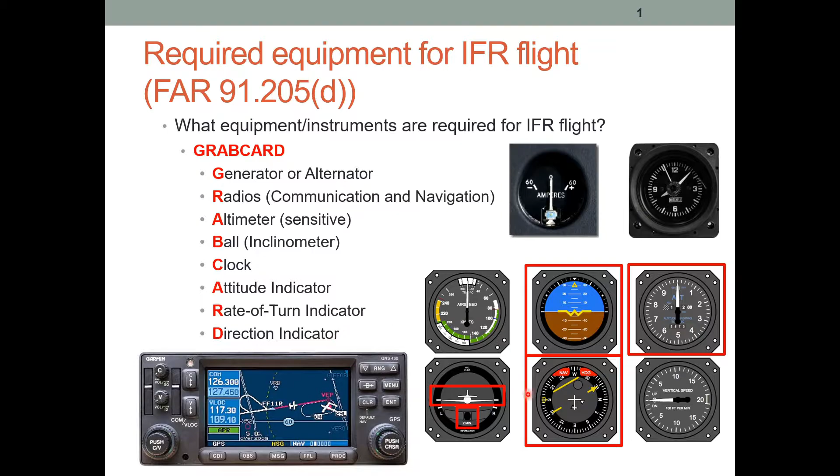Attitude indicator, which is right here. Rate of turn indicator, which is right here. And your direction indicator, which is down here. So next is your glass cockpit or primary flight display, which is down here. And it says, do glass cockpits have the same equipment / instruments?

They do. They get you their data in a different way, but they have everything you need for an IFR flight. Right here is your airspeed indicator. This is your altimeter. This is your VSI. Of course, it's straight and level, so it's not reading anything. Right here, this is your ball, more or less, or your inclinometer. This shows you your angle of bank.

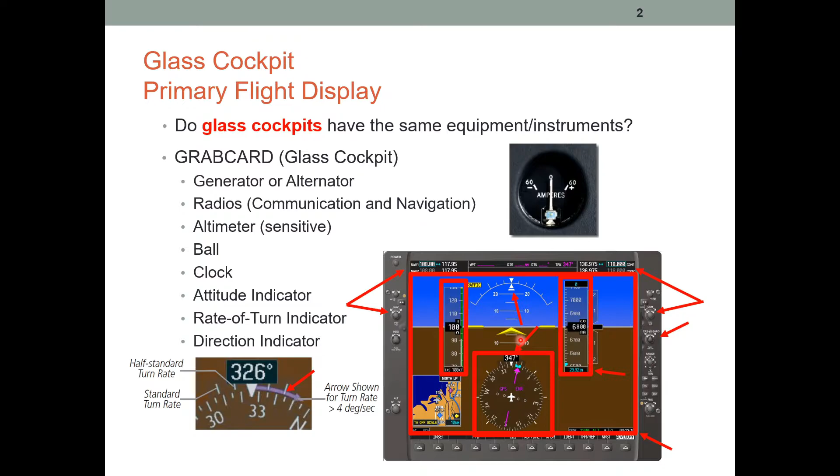This right here is your HSI, or your direction indicator. This is your attitude indicator, and that's pretty much everything you need for an IFR flight. Remember GRABCARD though, that is the big thing to remember. And next we have which instruments are traditionally gyroscopic. Big word, traditionally, because nowadays you're getting your data from your air data computer or attitude heading reference system.

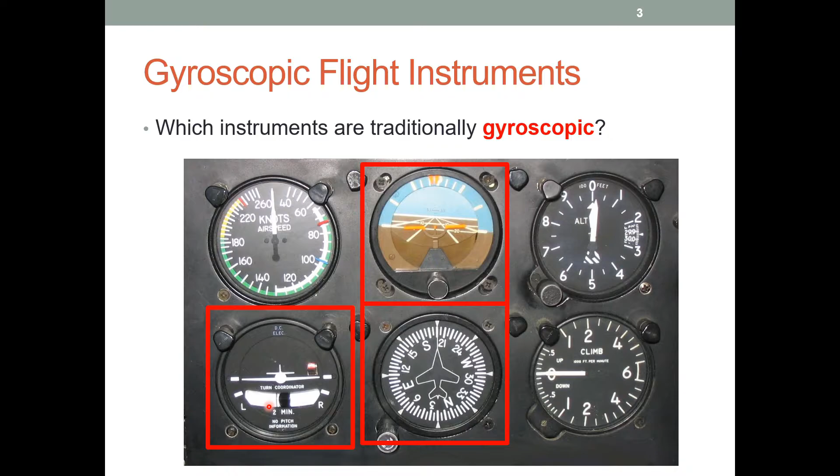But back in the day, your gyroscopic instruments were powered by a vacuum driven engine pump, which is your attitude indicator, your direction indicator, and your turn coordinator. Your turn coordinator is actually gyroscopic, but it is electrically powered instead of vacuum powered. Next, we have what are the principles of a gyroscope. So the two main are precession and rigidity in space.

So imagine these, you see these little spokes right here. Imagine they are actually attached firmly to the aircraft. As the aircraft moves around this gyroscope right here, which is spinning rapidly, which is why it is rigid in space, that is going to give you whatever you need it to give you. It's just not going to move.

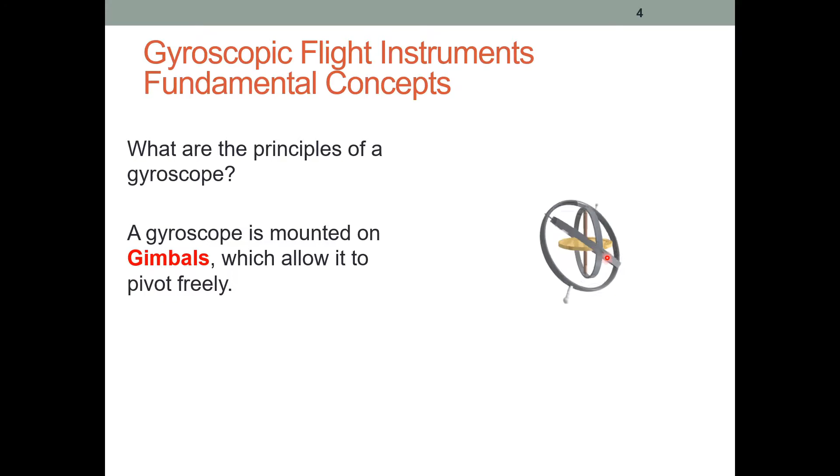And that is what's so crucial, because there used to be this thing called seat of the pants flying, which a lot of pilots did, and a lot of pilots died because of that, because you don't know where you are. That's why in the last unit I covered spatial disorientation, that's why gyroscopes are so important to maintaining that orientation. And the gyroscope is mounted on gimbals, which I just showed you, which are the things that freely rotate around your gyroscope.

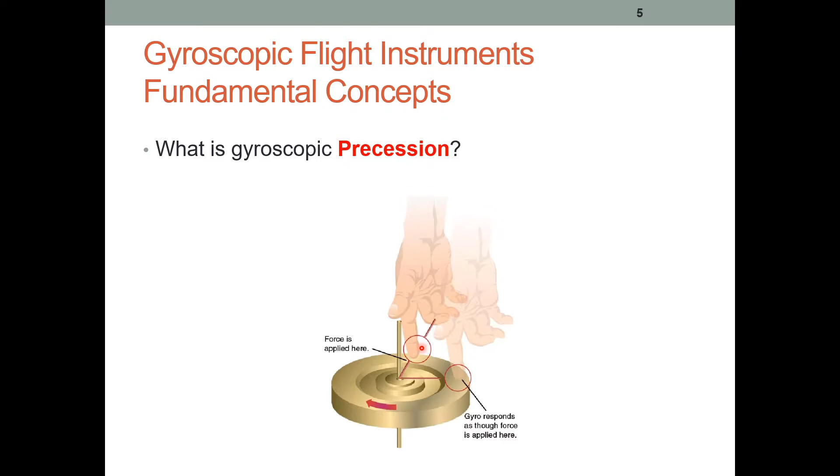So next we have precession. I just discussed rigidity in space. Precession is more or less as you apply a force to a rapidly spinning gyro, that force is going to result 90 degrees later. And actually go on Vsauce and look up gyroscopes, because Vsauce gives you a great example. And I know Vsauce is like a meme channel, but it's a really good example of how they work. It discusses precession and rigidity in space.

The next we have is the attitude indicator. So actually on an attitude indicator, you see these fins right here. These fins do not move at all. What actually moves is the artificial horizon in the background, which as you pitch up or down, is going to make the artificial horizon move down or up. And then you've got this ball down here.

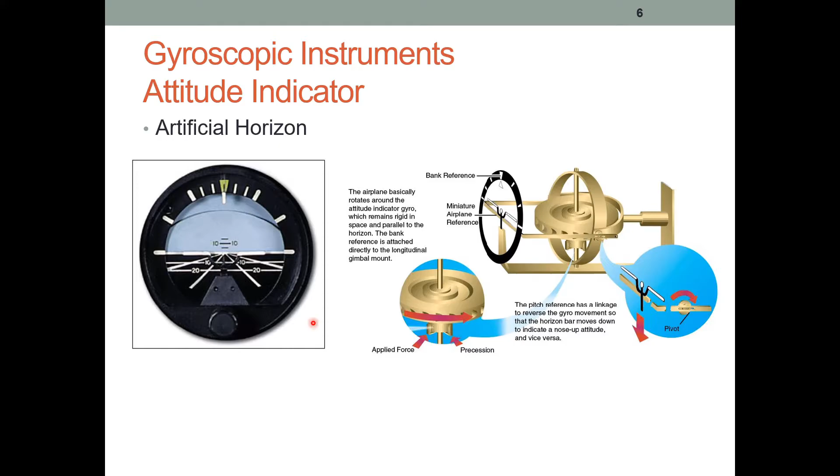So when you start your aircraft up, you want to set these fins to the artificial horizon. You want to make sure after 5 minutes, after the vacuum has enough power, after it's rotating fast enough, that it is correct and stable. If it's not, you might have a big problem on your hands. This, of course, is a schematic of how it all works. It's really cool to look at if you want to, but that's just the general principle.

Next, we have how do we adjust the attitude indicator before flight? I literally just went over that. It's by this little knob right here, and you adjust the little plane up or down. Of course, in a PFD or a glass cockpit, you don't get that privilege because it automatically does it for you. But if you ever fly steam, which is what I learned on, that is something you need to do.

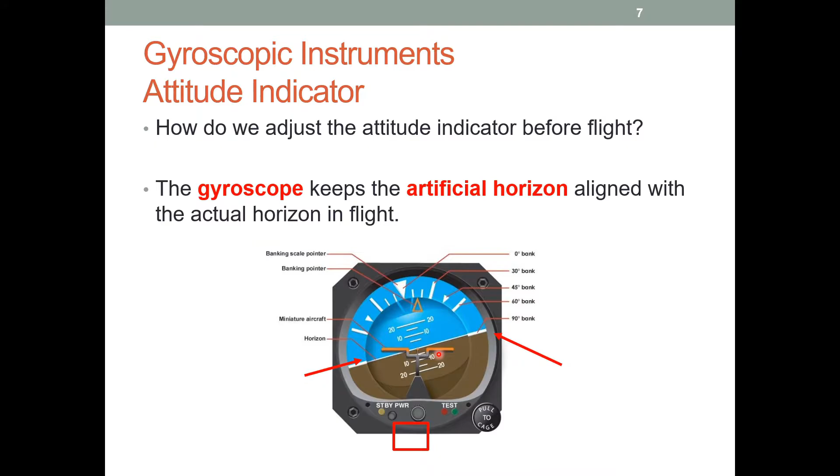So there you go. Next we have, when does the attitude indicator have the greatest errors in a turn? So whenever you turn a full 180 degrees, that is when your greatest error occurs. So just think about it.

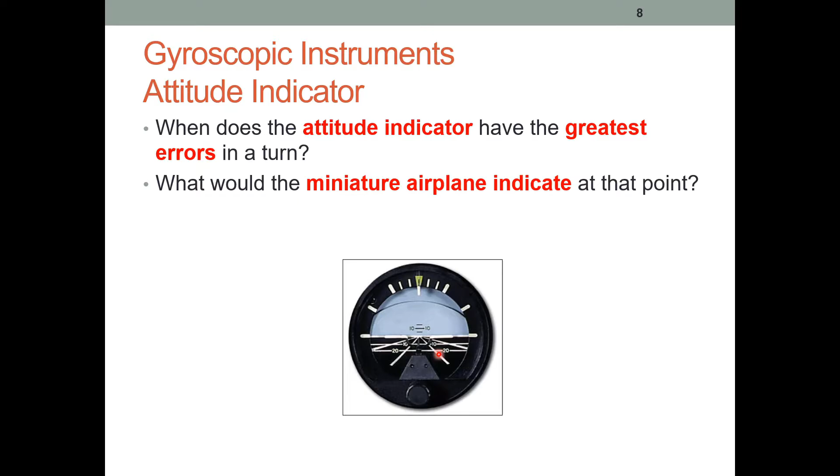East to west, you turn that much, and that's going to make your attitude indicator precess. If we go over here, imagine you are turning to the left, like a steep turn to the left, and you come out of that turn. Your attitude indicator, the gyros inside of it, are going to want to precess, and it might show you a slight indication to the right.

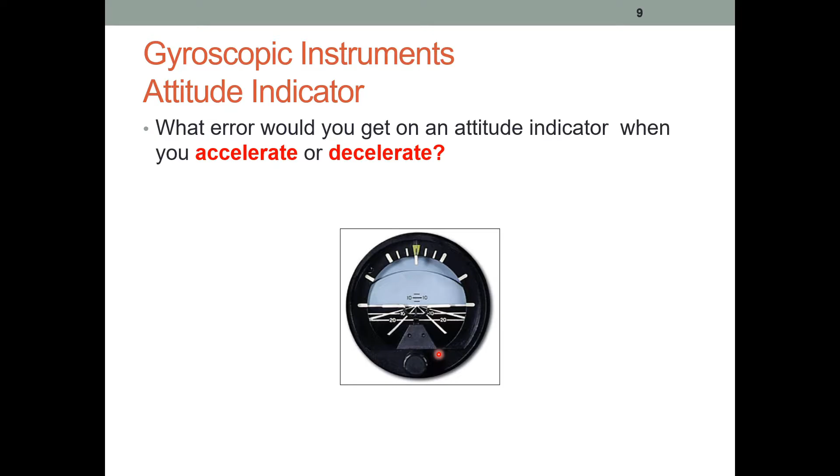Now in VFR, this is no issue, but in IFR, it can lead to some moderately severe, that's an oxymoron, disorientation. But just remember, if you're coming out of a turn from the left to straight and level flight, you might get a turn in the opposite direction. And that's one thing on your written that you'll have to know. And it's one thing to know in flight because it can lead to spatial disorientation, which we don't really like.

The next is tumbling. Now, you won't really experience this in electronic, PFD, glass cockpit stuff. But back in the day with aerobatic planes, or if you've somehow upset your plane so much, not emotionally, of course, just like stalled or whatever. If you exceed 100 degrees of bank or 60 degrees of pitch, so 60 up and down, 100 left or right, it's going to tumble your instrument because the gyroscope is going to precess so much that it just interrupts the whole flow of things, and this is what it might look like.

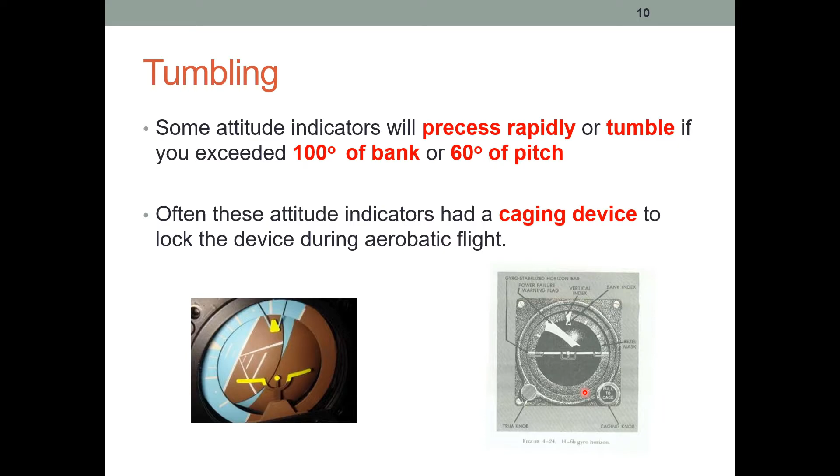Now, after a while, they will come back straight and level. It will catch up with itself and it will stabilize, but sometimes they will not, which is why it is incredibly important to know this. That is why a lot of them have cages, which will cage the gyro so it cannot move, which means it cannot tumble.

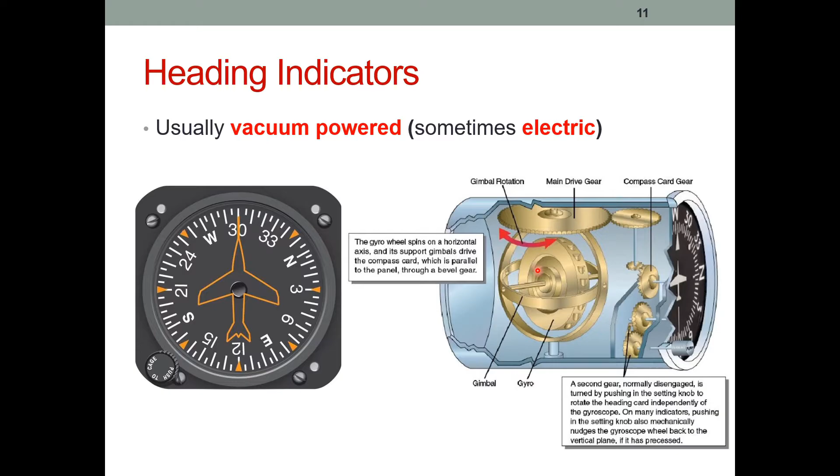Heading indicators are, once again, vacuum powered. They use a different way of using the gyroscope, as seen in the schematic, to give you your heading. And the thing is, you have to set this every time before a flight, unless of course it is electrically powered, getting magnetic direction from another source. But 9 times out of 10, if you're training in a steam gauge plane, somewhere up in the cockpit there's going to be a magnetic compass, which you'll see later in these slides, that you set and align it to. Because 9 times out of 10, when you start the aircraft, it is not going to be aligned with your magnetic compass. As you can see later, the compass just has a lot of errors involved with it.

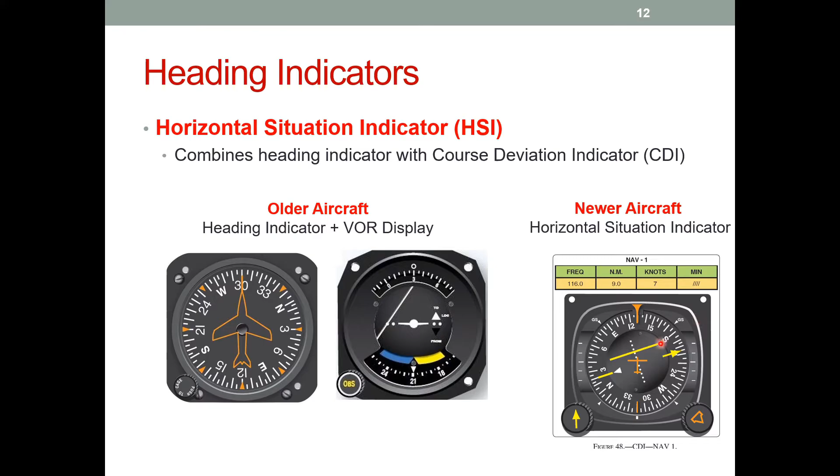This really makes it simplified. You would just fly towards that little CDI right here, with the to and from flag here. And you'll see these arrows here, and this makes it so much easier. I grew up on this and this, but a lot of people nowadays are using the HSI, which I love. It makes everything a whole lot easier and leads to better spatial orientation.

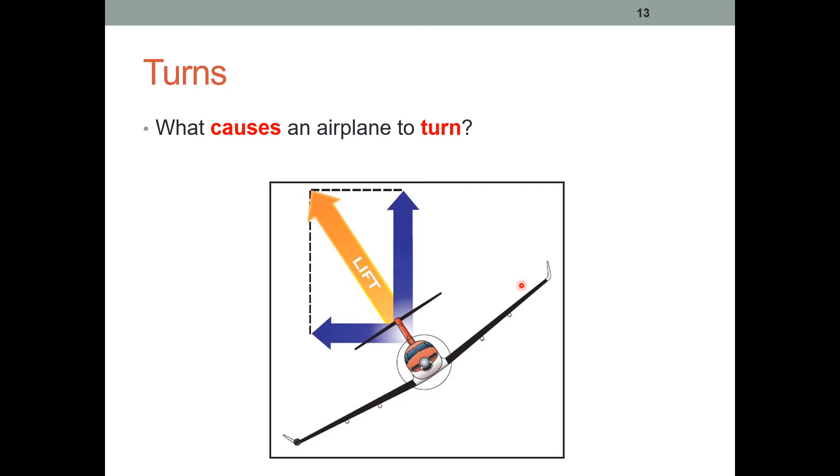The next are turns, and this is more airplane aerodynamic theory. What causes an airplane to turn? You'll be like, oh, just left aileron, right aileron, there you go. But more specifically, this right here is your horizontal lift component, and this is your vertical. Your vertical component decreases as you turn, and your horizontal component increases. You increase your vertical component of lift by pulling back on the yoke, which gives you back elevator, which is why in steep turns you need so much back elevator to maintain level flight.

So here's the thing, in IFR, how do we know when our turn is coordinated? As you can see down here, here's a turn coordinator, which will give you your turn coordination. You also have a turn and slip indicator, which is usually in the older planes, but you might see one someday flying some general aviation aircraft.

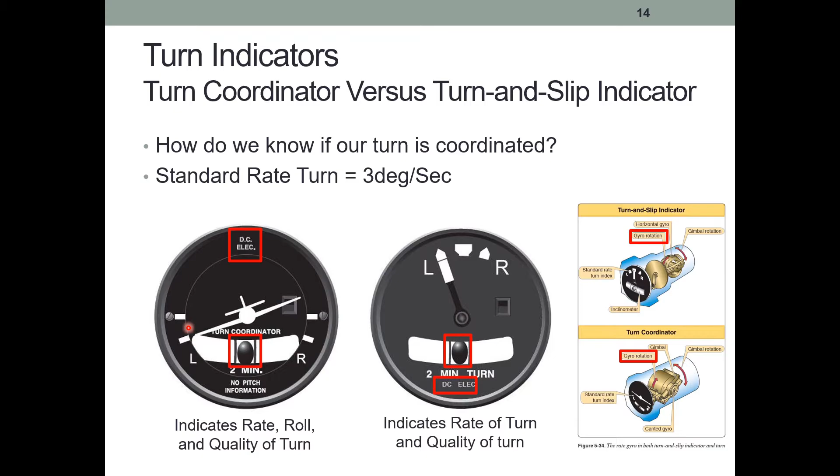The main difference, though, is your turn and slip indicator only gives you your rate of turn and your quality of the turn, while your turn coordinator gives you rate and roll. You can see by the aircraft, it's banking to the left, while this is just a needle indicating rate of turn. However, this only indicates initially rate of bank until it is established. What primarily gives you your bank angle is your attitude indicator, but that's just getting into primary and secondary instrument theory, which we will learn in a later lesson, hopefully.

The next thing is, what could you use as a backup for the attitude indicator? And I actually just said this. So this, like I said, indirectly indicates your bank for your turns, and of course indicates rate of roll, which more or less could serve as a backup for the attitude indicator. It just does not show pitch. That's why the attitude indicator shows it. But for pitch, you can use airspeed, you can use your altimeter, and lastly, you can use your VSI for pitch.

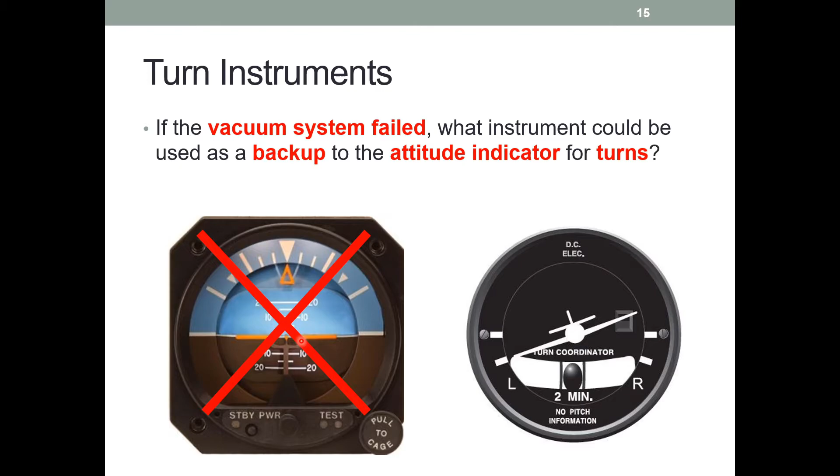The next thing we do is estimating the angle of bank required to make a standard rate turn. Nine times out of ten for the aircraft you fly in, like from 90 to 130 knots, how you get the angle required is you divide true airspeed by 10 and then add 5. So let's say you're flying at 100 knots, that's easy. Divided by 10 equals 10, plus 5, 15 degrees.

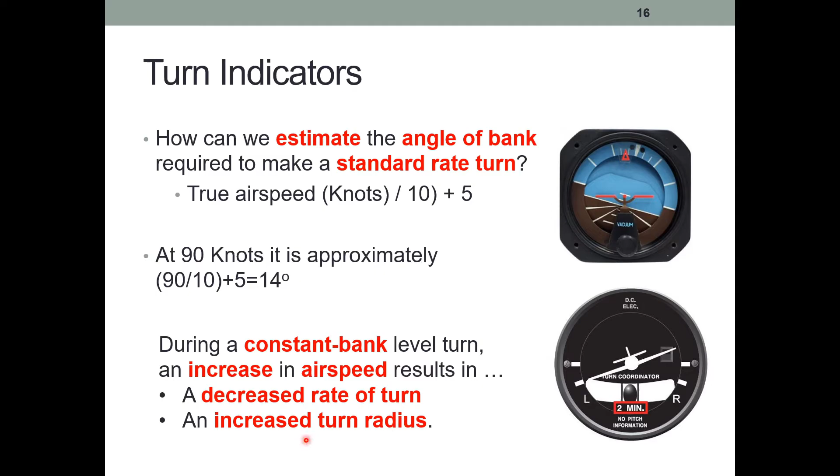So if you look right here, if you're training in like a DA-20 or a Piper Archer, Piper Arrow, your standard rate's usually going to be right here. Right, 15 degrees, because this is 10, 20, 30, 15 degrees right there. During a constant bank level turn, an increase in airspeed results in a decreased rate of turn and increased turn radius.

Next, what we got is our slip and skid. Basically, I could go into horizontal versus centrifugal force, but right here, a slip is a rate of turn which is too slow for the bank, and the ball moves to the inside of the turn. So if you look down here, the ball is still left on the inside of the turn since we're banking to the left, giving us a slip.

A skid is a rate of turn that is too great for the angle of bank, and the ball moves to the outside of the turn. And if we look right here, the ball is on the outside of the turn, we're turning to the right, skidding the aircraft. Think of this one as the aircraft falling to the ground, like the ball is pulling the aircraft to the ground, and this as the ball is pulling the aircraft outside of the turn.

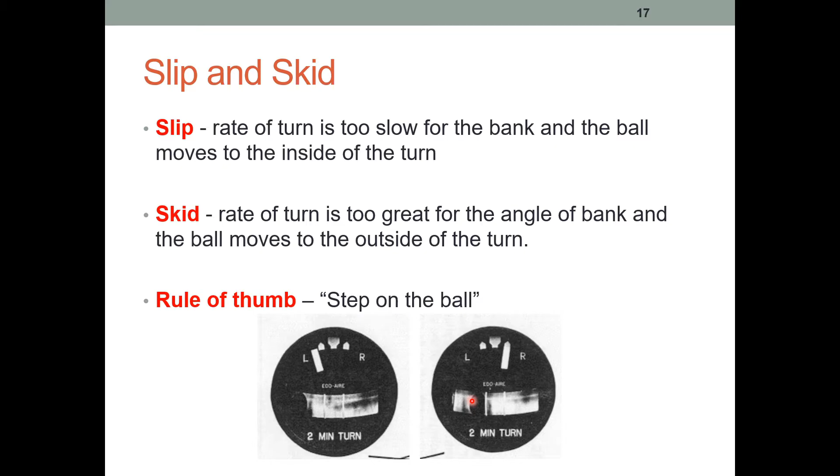As you can see down here, as I was saying about horizontal component of lift and centrifugal force, a slip, see the ball how it's inside the turn, your horizontal component of lift going this way is actually greater than your centrifugal force. Your centrifugal force, once again, like when you have a pendulum or something swinging around, that ball just wants to shoot in a straight direction out away from the circle.

However, in an airplane, you can't shoot straight out because you have the factors of airspeed, resisting and pushing and lifting and whatnot. Right here, you have a skid, which is your centrifugal force is greater than your horizontal component of lift, causing your aircraft to feel like you're getting pushed out of the turn. And then, of course, a good quality coordinated turn is when centrifugal force and horizontal component of lift are equal. Keep in mind that your vertical component of lift might not equal horizontal component of lift, but you can still have a coordinated turn.

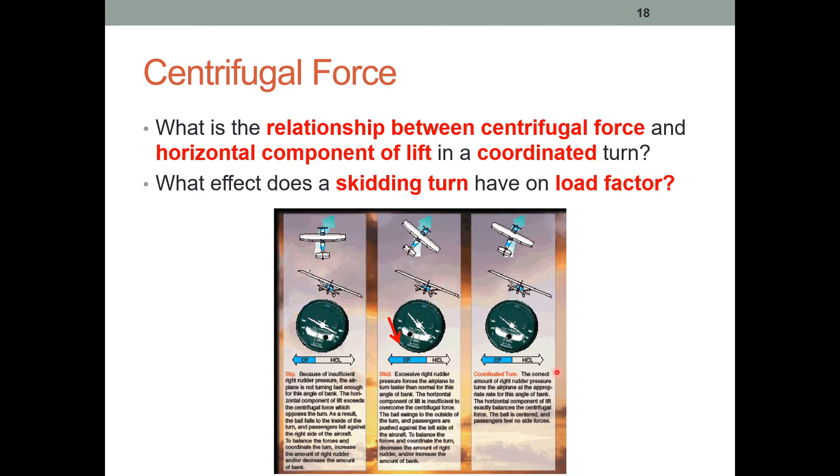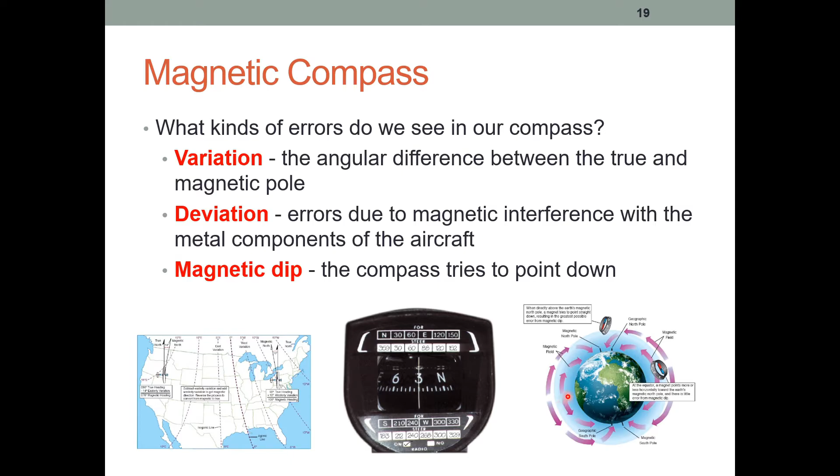And the last error we have is the magnetic dip, which as you're flying over the earth, let's say I was flying right here, my magnetic compass isn't pulling out here, it's actually pulling towards the earth, which is going to cause you that dip, which as we move on right here, it's going to cause our errors.

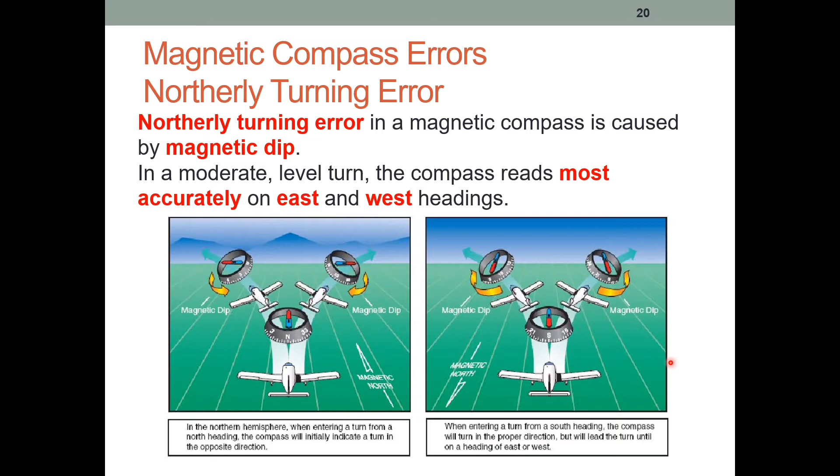While I could read all of this, all you have to know is UNOS, undershoot north, overshoot south, which means if I was going to turn to the left from a northern heading, I would initially indicate a turn to the right. And if I was to turn to the left from a southern heading, it would actually overshoot that by a large margin.

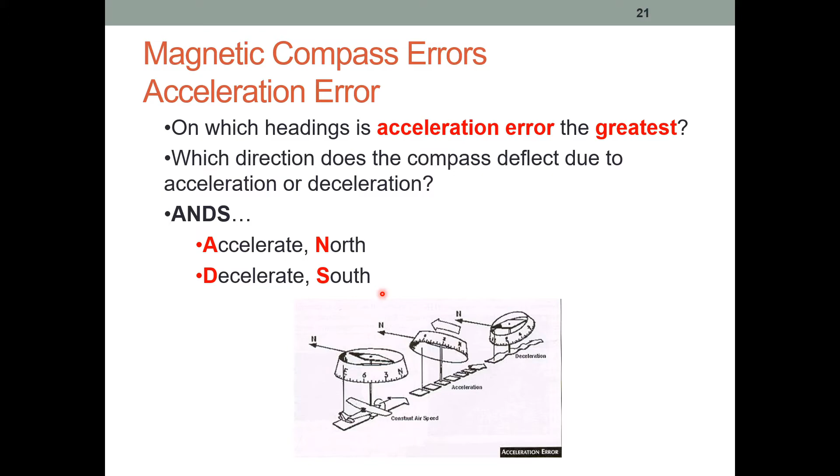So the next we have, I could once again read all this, accelerate north, decelerate south. The most stable directions to turn for the magnetic compass is from an east or west heading, but due to the magnetic dip characteristic, we have accelerate north and decelerate south. And so if I was to accelerate to the east or to the west, my compass would dip to the north, and if I was to decelerate, it would naturally inversely dip to the south.

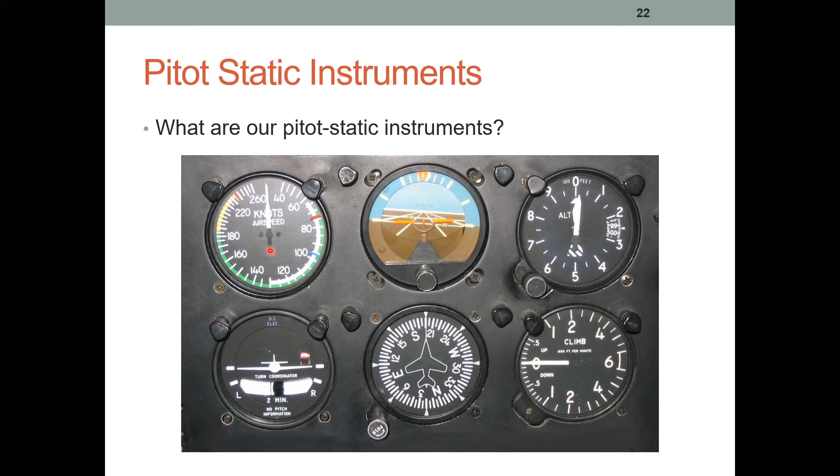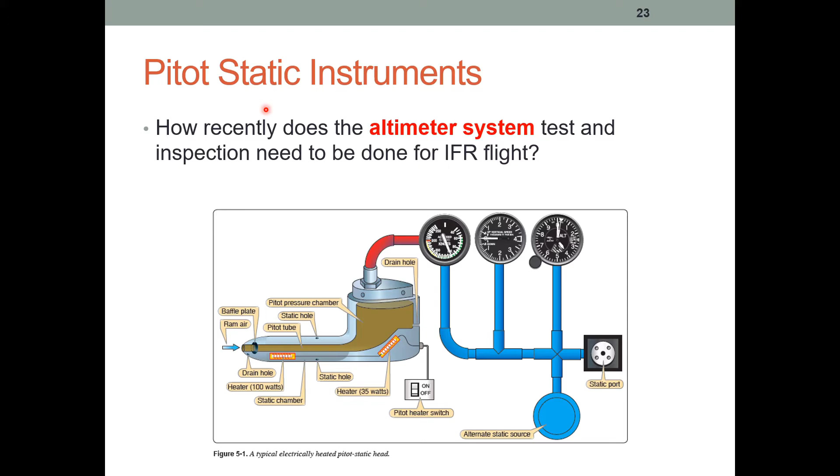So next, what are our pitot-static instruments? Our vertical speed indicator right here, altimeter, and then finally your airspeed indicator, which are our main instruments given by our pitot-static system. Here's a regulation you have to know. How recently does the altimeter system test and inspection need to be done for IFR flight? That is done every 24 months. That is very crucial, or you cannot go on an IFR flight.

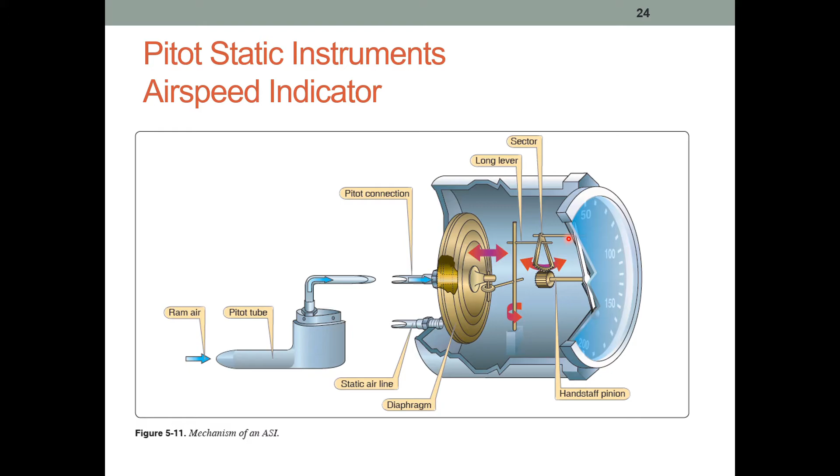The next we have, how does the airspeed indicator work? And this is something I didn't learn until the beginning of instrument training. You have ram air pressure coming in, which is received right here by the airspeed indicator, and you also have your static air line coming in. And of course, static air is just undisturbed what the air pressure is reading. So if you have undisturbed air coming in and ram air pressure coming in, that's going to cause a difference, which I believe is called dynamic pressure, which correlates to airspeed. So just remember, it is the difference between your ram air pressure and your static air line.

Equivalent airspeed is calibrated airspeed corrected for compressibility factor. You're like, yo, what's compressibility factor? It pretty much applies to very fast aircraft; it rarely ever applies to general aviation because our aircraft are so slow. But let's say for jets, as the air goes around the nose of the plane, it's going to be displaced so fast and so greatly, it's going to cause the air to bunch up, much more pressure, shoot off, and give you a different reading on your pitot tube on your wing. So once again, CAS corrected for compressibility factor: the air around your nose is going to be a lot more compressed than the air around your wings.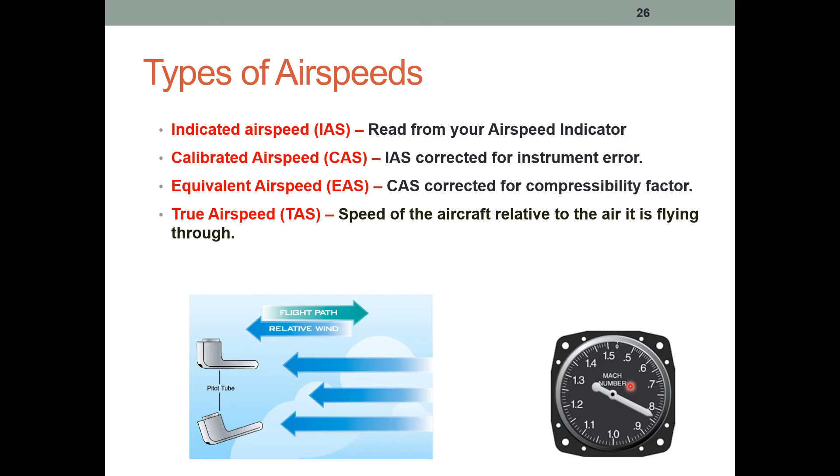Next is true airspeed, speed of the aircraft relative to the air it is flying through. On a perfectly calm day, your true airspeed is going to match your ground speed, which is just an easy way to think of it. Ground speed, of course, is your aircraft speed going over the ground, much like your car, for example, always reads in ground speed. Last thing we have that's kind of trivial, because we may never see this in our flight careers, but you might if you decide to fly really fast things, is the Mach meter, which is just simply the ratio of true airspeed to the speed of sound.

Next, and this is more important for your altimeter, is standard temperature and pressure at sea level. As you can see at 0, this is standardized. It's not set in stone, like 2 + 2 = 4. It's just what we said it was going to be, so we could have something to work off of as a society. At international standard atmospheric pressure, altitude 0 feet, pressure is 29.92, temperature is 15 degrees Celsius. And what's cool is around 18,000 feet, your atmospheric pressure is actually going to be around about 50%. And as you can see in the standard atmospheric model, 18,000 is around half of what 0 feet is.

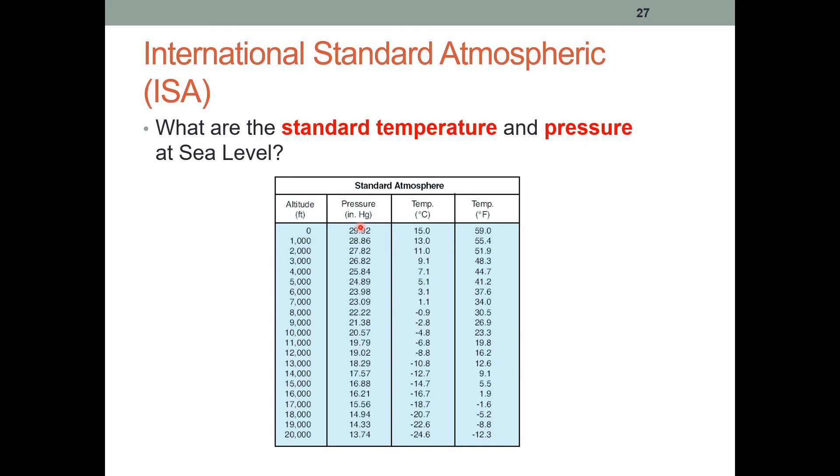Next, we have our altimeter, which just reads from the static port. It does not really need the ram air input or the drain hole to be operative.

It's just reading from the static port, measuring the difference between barometric pressure. As the barometric pressure decreases and increases, your aneroid wafers are going to detect that, giving you an altimeter setting.

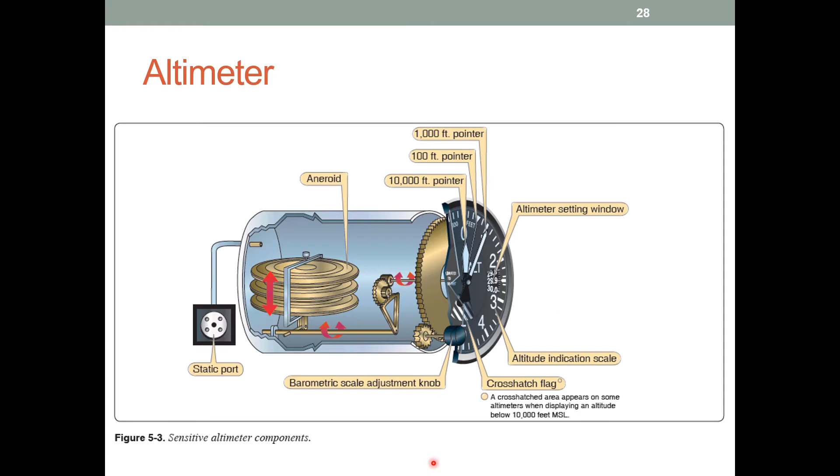Next are types of altitude. We have indicated, pressure, density, true, and absolute. Indicated altitude is what's read off the altimeter, much like your indicated airspeed is read straight off the airspeed indicator. Pressure altitude is what the altitude is when it's set to 29.92. So pressure altitude is more or less the altitude above the standard datum plane, which is what the standard atmospheric model is based off of.

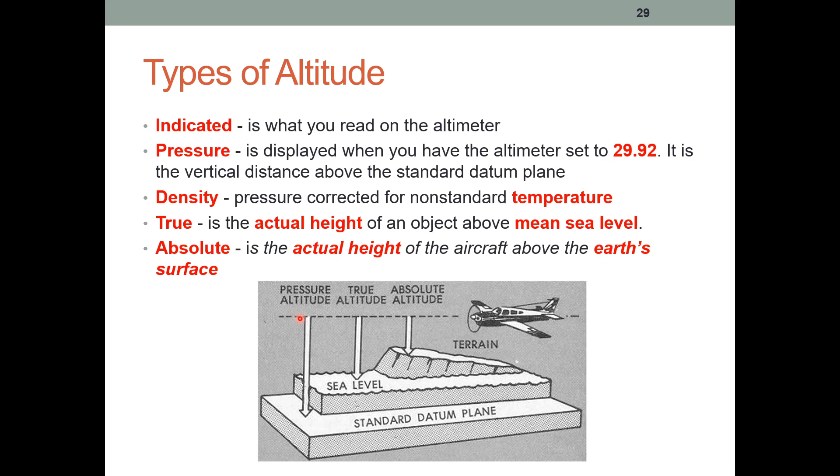Density altitude is pressure altitude corrected for non-standard temperature. This is going to give you your climb rates, very important in your performance charts found in your POH, for example. True altitude is the actual height of an object above mean sea level, while absolute is the actual height of the aircraft above the Earth's surface. As you can see here, absolute terrain, true altitude sea level, pressure altitude standard datum plane, and then of course your indicated is read off the altimeter.

So what are flight levels and where are they used? Flight levels can start anywhere from 4,000 feet above, typically. So like 4,000 feet is flight level 040. However, with the altimeter, you might have it set to 30.12, but right when you cross 18,000 feet, that's when pressure altitude flight levels start. So right when you cross 18,000 feet, you would set your altimeter to 29.92, and you would read the altimeter from there and keep climbing until you reach your designated altitude.

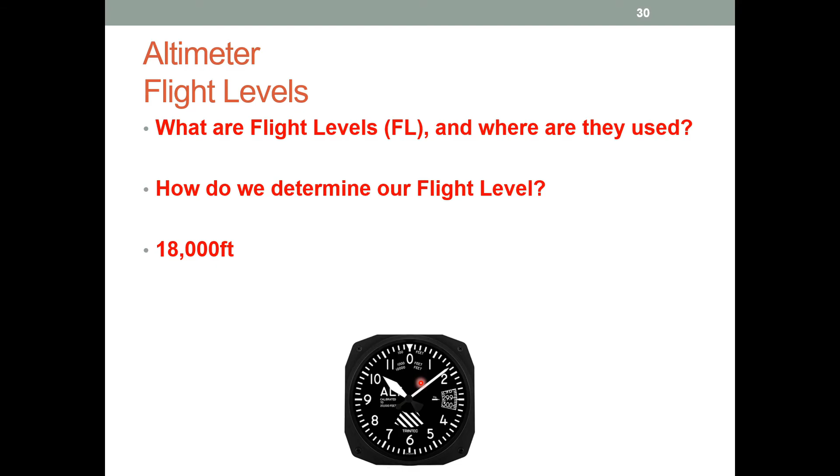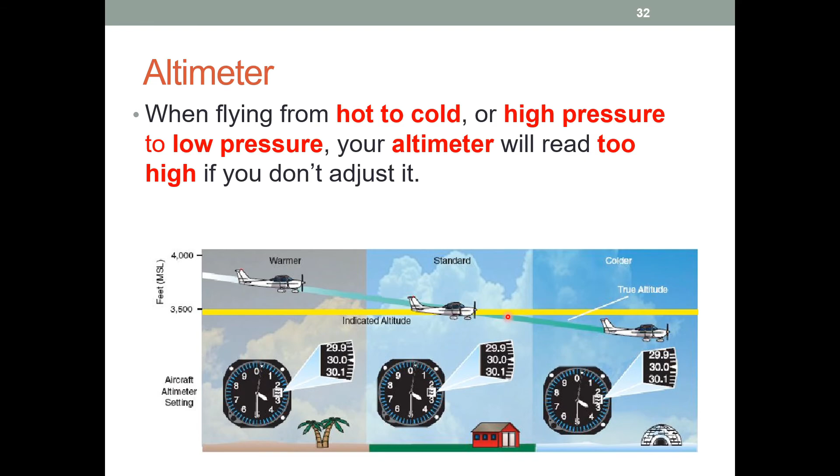So the next big thing about an altimeter that you need to know is when flying from hot to cold or high pressure to low pressure, your altimeter will read too high if you don't adjust it. For example, here, from warmer to colder temperature, you're actually descending, but your altimeter is slowly adjusting and indicating the same exact altitude. And of course, this is a perfect example of it doing that. Usually it's gonna be a little different than that, but high to low, look out below.

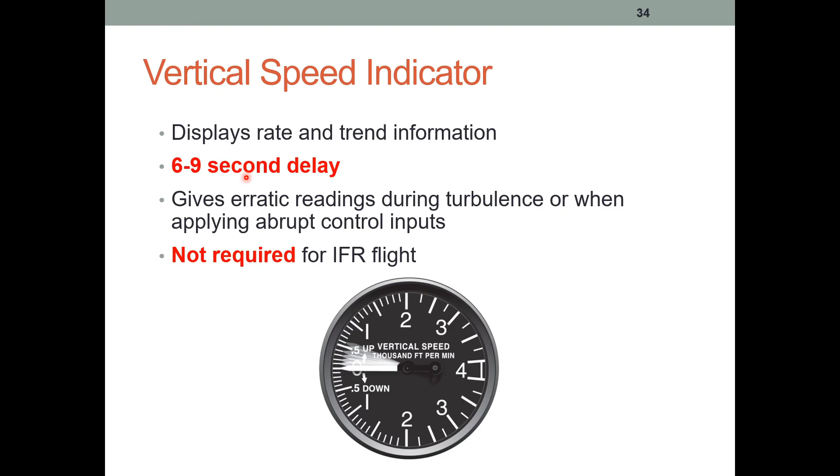The next is your vertical speed indicator. Main thing you got to know about this, it has a massive delay, so it's not going to show you per millisecond what your rate of climb or rate of descent is. All it really reads is rate of climb and rate of descent.

Next, we have our pitot-static system errors, which are very crucial because they can be caused by the blockage of the pitot tube, static port, or both. But main thing you got to be worried about is your pitot-static port can actually clog, usually due to dirt or whatever. But if you're flying into icing conditions, 9 times out of 10 it's going to ice there because usually small protrusions freeze first.

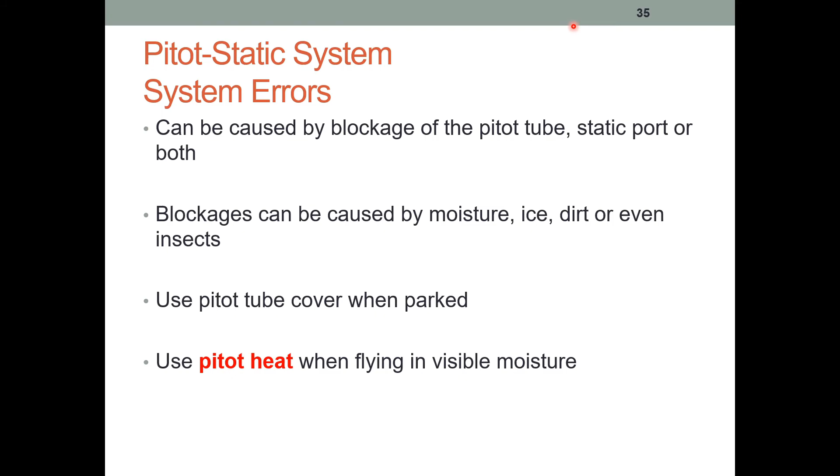Here's the thing, what would you suspect if your airspeed indicator indicates 0 in flight? If your airspeed indicator is indicating 0, that means that your ram air inlet is clogged, but your drain hole stays open. On the other hand, if your drain hole and ram air inlet were both clogged, your airspeed is going to remain in the same place, and as your static port gets more and less pressure, your airspeed is actually going to act as an altimeter. As you climb, it's going to slowly get faster, and as you descend, it will slowly get slower, quote unquote, which can really mess you up in IMC, because when you pitch down, your airspeed naturally wants to rise.

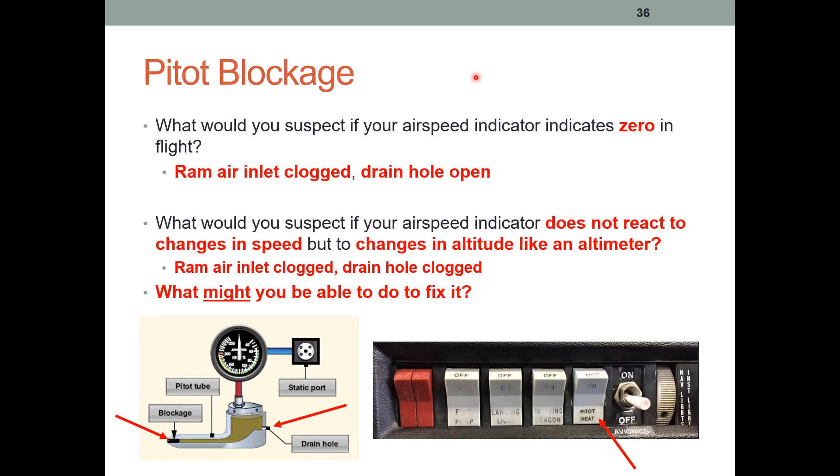Next you have is static blockage. If your static port is blocked, your VSI will actually drop to 0 because there's no difference in pressure anymore, which will, of course, cause your altimeter to freeze. And you might say, well, all hope's lost. If my static port is frozen, I don't know what my altimeter is. But last resort, you can break your VSI. Usually aircraft have alternate static sources that you can pull out.

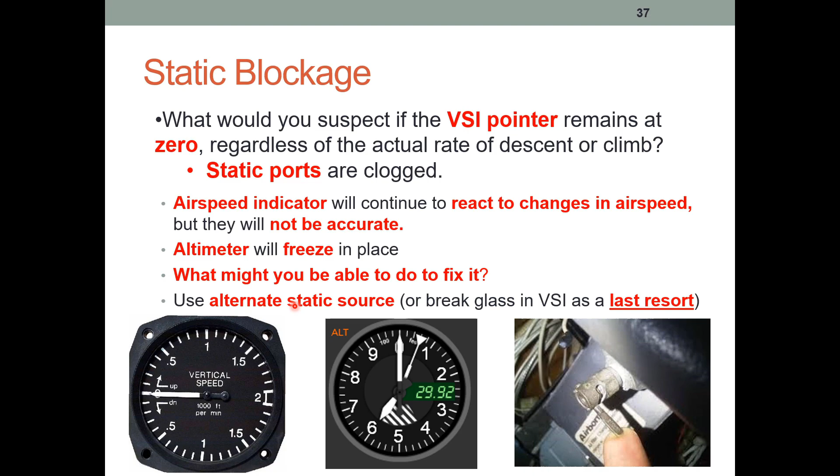Breaking your VSI will open up that static port, considering the aircraft is not pressurized, because then there would be no point at all. But if you're flying a PFD or a glass cockpit, you don't want to break that glass cockpit. They're definitely going to have an alternate static port in that case, but some older aircraft don't.

So the last thing we have is if an alternate source of static pressure is used, you just got to know what's going to happen. Let's say you break that VSI face or you pull that static pressure. The altimeter will read a little higher, the airspeed may read a little faster, and your vertical speed will momentarily show a climb. Keyword momentarily, and that's what they will ask you about.